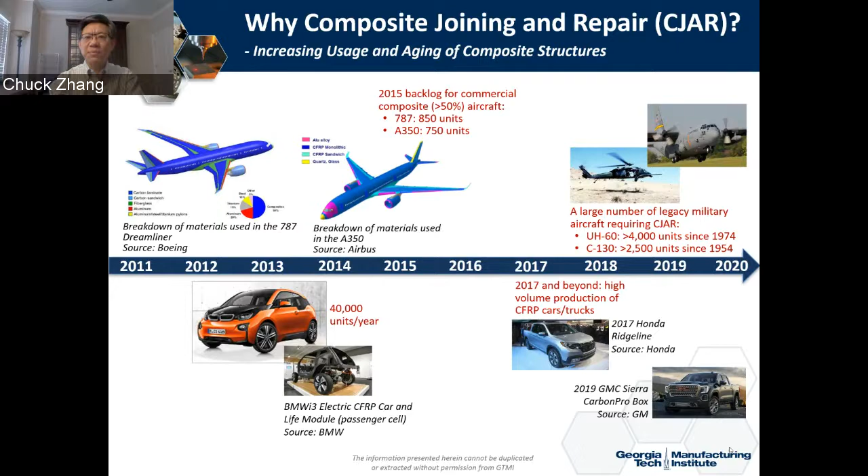This slide shows the financial and economic impact of this area of work. I don't know if any of you have knowledge about this. When you purchase an aircraft, depending on the model, it costs maybe over 200 million to buy one. But the maintenance, we call it MRO, maintenance, repair, and overhaul, can be very high.

For primary aircraft and structures, it costs about 7.7% of the purchase price to maintain the main structure of the aircraft. For example, for a Boeing 787, the purchase price is $218 million, but in the life cycle of the aircraft, over say 20 years, the airline company has to spend $16.8 million on airframe MROs. So that's a lot of money.

Just to give you a number, if you look at all the A350 and Boeing 787 aircraft delivered by next year, the total airframe lifecycle maintenance cost is estimated at 34.1 billion. So that's over 34 billion just for airframe maintenance down the road.

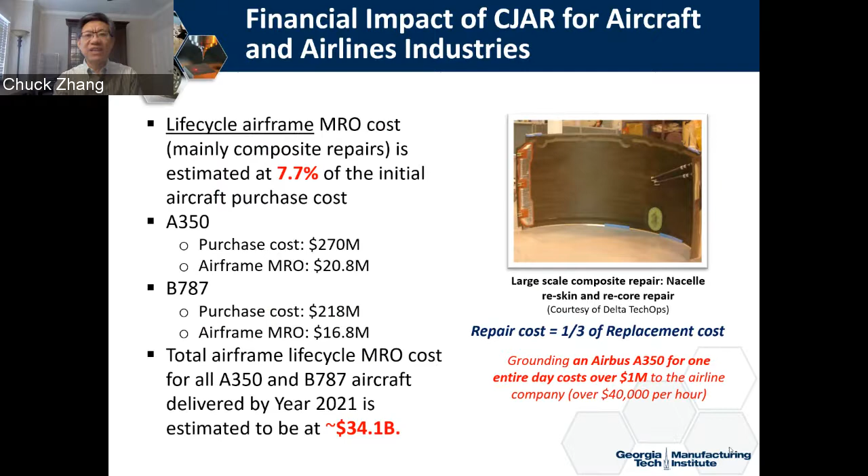On the right side there's a specific example of a composite skin of the engine of an aircraft, and you can see the repair cost is about 1/3 of the replacement cost, like buying a new one. So it's very expensive. Also, grounding an Airbus A350 can cost the airlines over $1 million per day, because of delayed or cancelled flights. So you can see there's a big financial and economic impact in this area of work.

Of course, like I mentioned, there's national security and societal impact in addition to the economic impact. You can see that composite joining and repair work can help improve military equipment readiness, but also reduce the cost of maintenance for national security applications.

Societally, I think everybody probably has a lot of experience with this when you fly. You definitely want good equipment for the aircraft so that it's safe, but you also want high on-time rates with no cancellations or delays. And again, emission reduction—if you have a lighter aircraft, you save energy, which helps the societal impact.

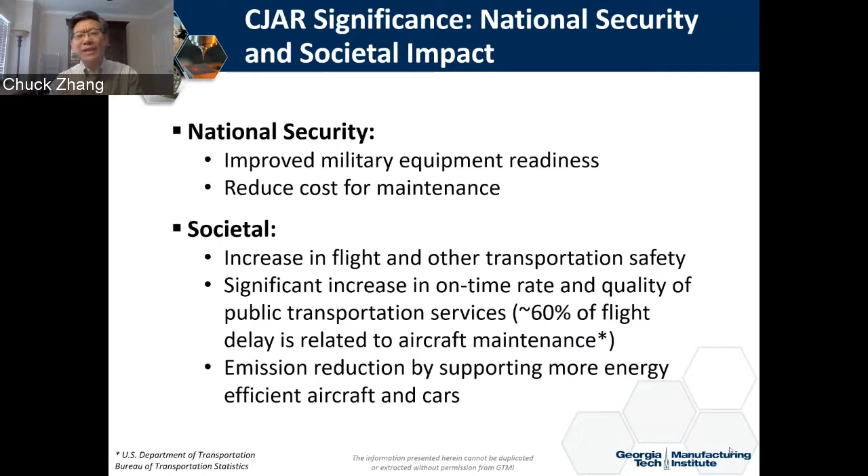The other thing I want to quickly mention is a number—I don't know if you know that 60% of flight delays are related to aircraft maintenance, not weather. When airlines have a cancellation or delay, they always say it's due to weather, but actually 60% of the time it's because of maintenance.

So now we know it's very important, and there's a lot of need and demand for technology development in this area, with a lot of financial, national security, and societal impact.

So in 2014, about 5.5 years ago, Dr. Ben Wang, who's the executive director of GTMI, and myself wrote a proposal to NIST, the National Institute of Standards and Technology. They had a program at that time called AMTech, Advanced Manufacturing Technology, which provides funding for a team from a university or industries to develop technology roadmaps—not technologies themselves, but the future development trends in a specific technology area. We wrote the proposal and received the grant.

When we started the project, we polled industry members. Many of them, we went to the CAMX conference, where we had a special session and polled 80 companies. From all this feedback from industry, we asked them to rank the technologies in composites that they wanted us to develop a technology roadmap for.

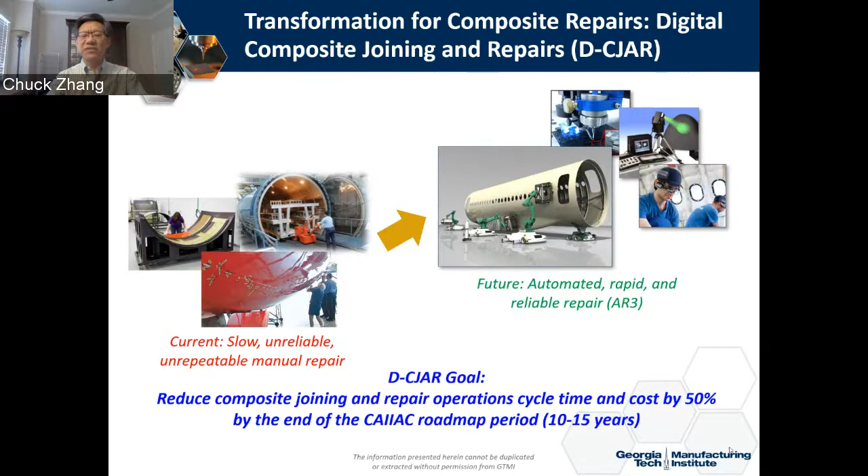So we wanted to know what is the current technology, state of the art, and what are the issues, what are the gaps, and then what is the future technology development, the trend, and an analysis of those trends.

So we actually adopted this technology roadmap development methodology, and we basically have two phases. Phase one is to develop this roadmap. Phase two is to have this consortium implement it by conducting projects and forming more technology development and demonstration, especially facilities and test beds.

So in the first phase, that's the NIST project. Basically, we gather data from the industry experts, and then we look not only at the input from these experts, but also at the scientific publications, patents, and databases, and then combine those data and formulate it into a kind of roadmap.

In the roadmap, we not only look at the technologies, but also look at their maturity, like TRL, MRL levels, during this 10 to 15 years of development. And then we validate the roadmaps with those experts. So that is phase one.

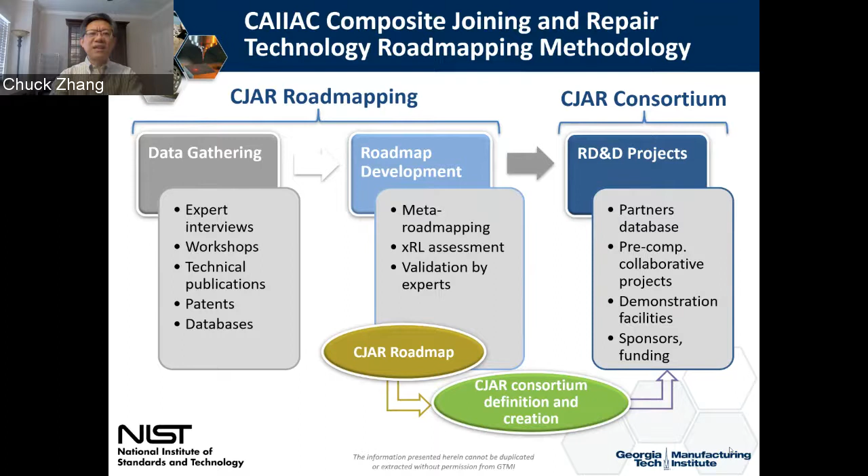I'm going to talk about this phase one work. In fact, the first thing we did, I believe it's 2015, we looked at the current roadmaps available that were developed in the last about 15 years in the area of composites, and we found many of them, actually over 40 of those roadmaps are available.

So we thought, well, we need to do something different because they already have 40 roadmaps. Why do we do another one, right? So we thought that our meta roadmapping, which I mentioned earlier, combines the scientific publication data in addition to the experts from industry, but also the patents and all that. So that is one uniqueness of this roadmapping effort.

The second one is we involve or include the technology maturation parameters, like in this case TRL, MRL. We also created another readiness level: one is a business case, and the other one's ecosystem. So we want to look at if this technology is not only technology-wise mature, maybe manufacturing technology is also mature, but what about the business case and ecosystem? We also look at that during this technology roadmapping effort.

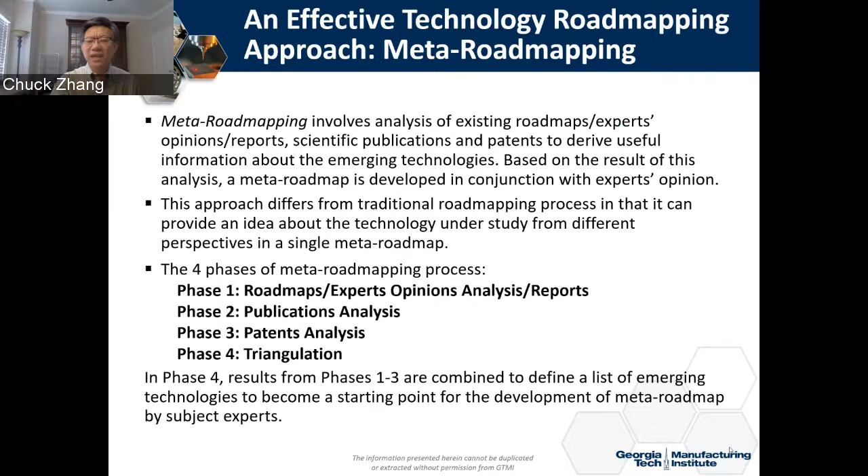In addition to the workshops, we also did a lot of phone interviews with specific experts in specific areas, so we made many calls. And then we combine all the data. That's phase four, which we call triangulation. Basically, you get all those data from these three sources, and then we combine them to make this technology roadmap.

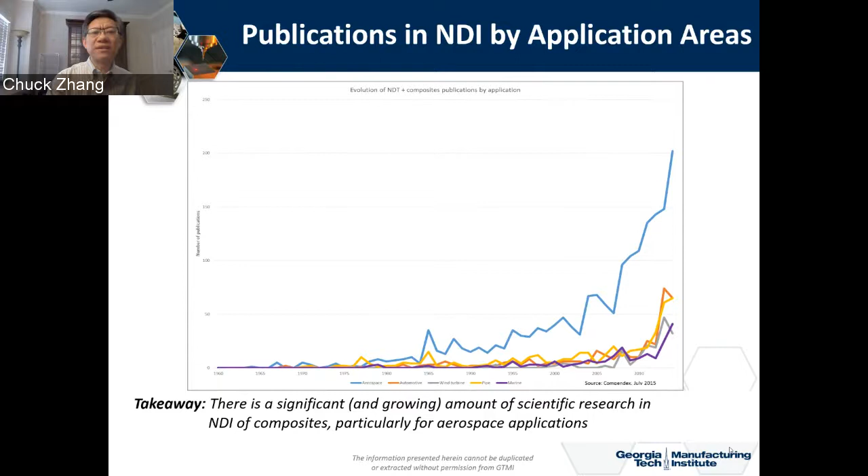So you can see, especially in the last 10 years, this area has gotten a lot of attention. And then, more importantly, we can do some quantitative NDI analysis.

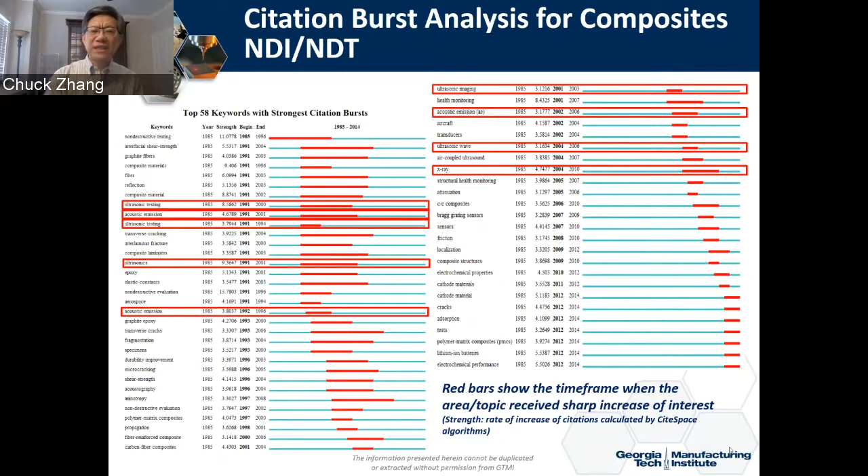You see a lot of technology that moved - some developed many years ago, and then had a certain time frame, like 5-10 years, where they were pretty popular or hot, but then they kind of disappeared. And some of them actually came back again, like acoustic or ultrasonic things - it was hot in the 1980s and 90s, but disappeared for a while, then now it's coming back again, probably because of progress or advancement in that area, or computing technologies that can help. So this will also help us develop the roadmaps.

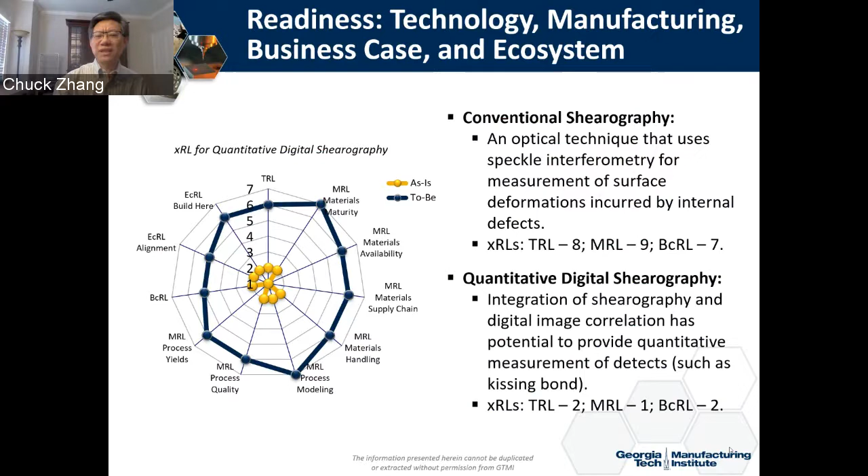This is about the readiness. So for each technology area, when we develop a roadmap, we also look at what is the TRL level of this technology at the current stage, and what is expected 5 years down the road, 10 years, and 15 years - what do we expect them to grow. This data is from publications, but also from industry experts' input.

So finally, about 3 years ago, we finished the project and published this technology roadmap in the 6 areas, and we even made a book. We have an electronic version - if you're interested, please feel free to contact me and we'll send it to you.

This is just to give you an example - one of the examples for one of the NDI areas, the general NDI. You can see it covers several technology areas, from very old technology like visual inspection, all the way to ultrasonics - there are several ultrasonics - and radiologies, and terahertz imaging.

On the right side, it shows the 15 year time frame, how we expect those technologies to develop or mature. For instance, if you look at Lamb wave - I'll just pick an example - that's one specialized ultrasonic technology. We thought it'll take about 10 years to develop.

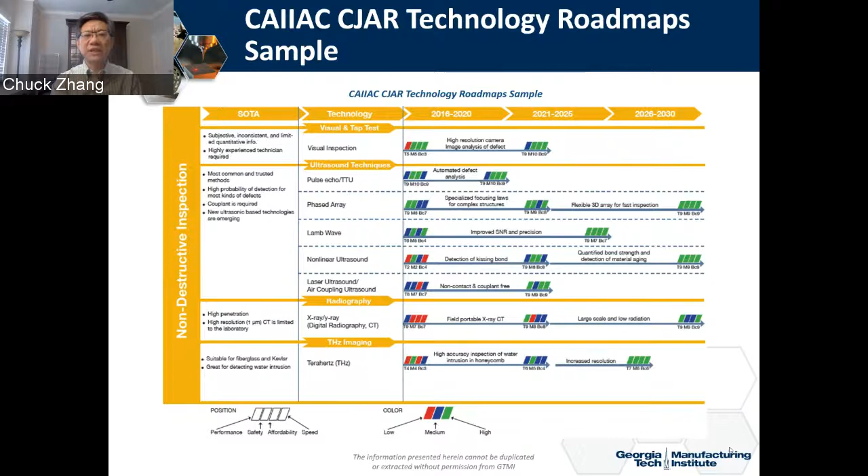So this just shows one chart, but we have many of them, like materials - materials have multiple charts, and equipment and automation also have a chart. So that is kind of showing the roadmaps.

This is the major work we did, and after that roadmap developed, with the industry experts' help, we looked at the vision of this technology development in the next 10, 15 years. We want to achieve this automated, efficient, reliable repair process - what are the key technology areas we should develop? This slide lists 6 major technology areas that we should develop and mature.

We call it digital composite joining repair, relying a lot on digital technologies. For instance, the first one - we want to have structural damage evaluation before the repair. Right now, most of this work is done by a manual process - you'll see a technician go around the aircraft.

They actually use a coin to knock the structure and use their ears to listen, and that's what a lot of companies are doing right now - basically an experience-based, trial and error kind of process. But in the future, we would like to have digital AR or NDI technologies so the technician can remotely monitor this damage evaluation process.

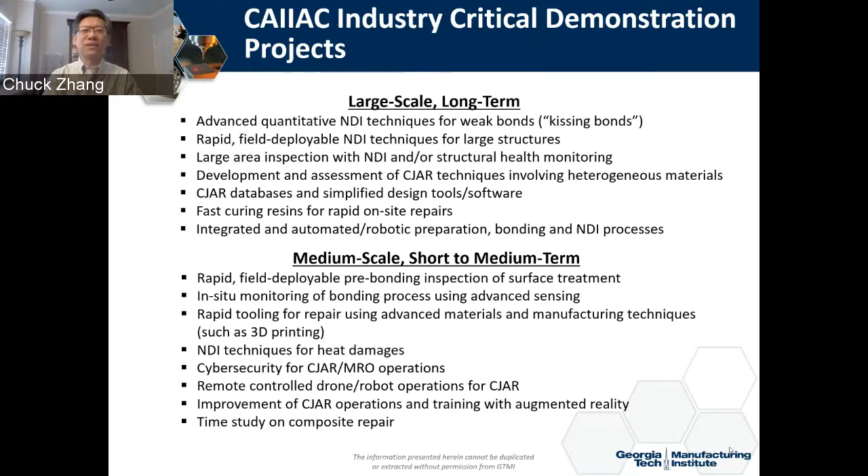This consortium also helped us, at the end of the project about two years ago, develop a laundry list of projects—large-scale long-term projects, but also medium-scale short-to-medium-term projects. We're using that as guidance to develop our research programs in GTMI. I'm not going through this now, but you'll have this information later so you can look at the list.

Next, I want to show you GTMI's capabilities and research in this field. I'd say GTMI has capabilities and competency in four areas. First, over the last five to six years we've built up a lot of fundamental understanding of materials and processes in composite joining and repair. We also have a comprehensive set of equipment for this area of work, and a lot of collaboration with other schools—ISYE, ME, MSE, and other related units. We've built a very strong capability in data analytics and cybersecurity for composite joining and repair. Finally, we have very unique work in quantitative NDE, especially for kissing bond detection, which is a major problem for aerospace applications of composite bonded structures. I'm going to show you some detail of our work in this area.

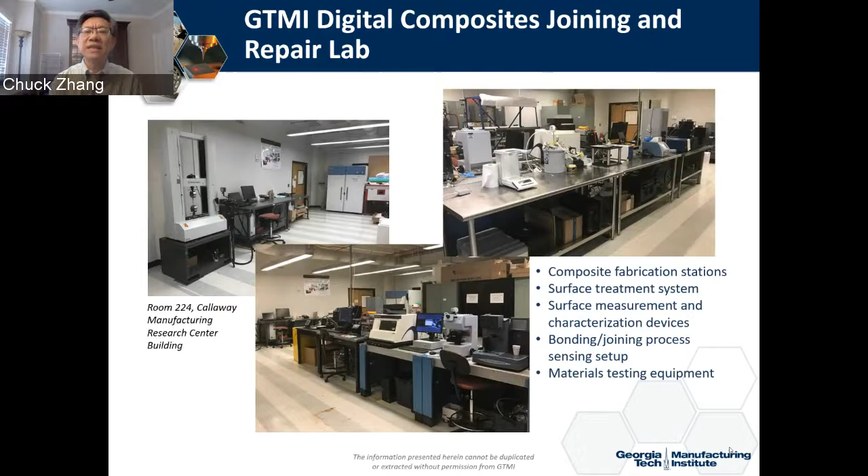I want to quickly show you four areas of our work in GTMI related to composite joining and repair: monitoring of the bonding process with advanced sensing, quantitative NDI, computational modeling and AI tools for composite joining and repair applications, and finally a planned use of augmented reality for CJAR operations.

A few years ago we started this area of research. We found that a lot of industry companies doing composite joining and repair primarily rely on manual processes—they don't monitor the bonding process well because there's no technology for it. So we thought, well, there's a lot of new development in sensing and advanced manufacturing, like 3D printing, so we wanted to develop some kind of advanced sensing specifically for composite joining.

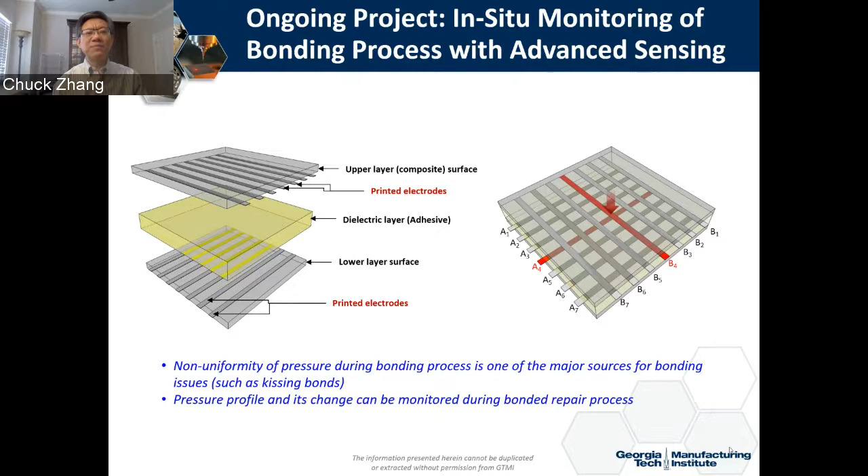The idea is: if you put electrodes on the surface of the adhesive. Let me introduce this a bit—when you repair an aircraft structure, you have a piece of composite material on top and composite on bottom, and you put an adhesive film in the middle, usually about 1 to 2 millimeters thick. You pack them, vacuum bag them, then put it in an oven, autoclave, or heating blanket. You heat it so the adhesive melts and bonds the two pieces. If you put an electrode on one side of the composite and another set of electrodes on the other piece, arranged in a certain pattern, it can be used as a sensor.

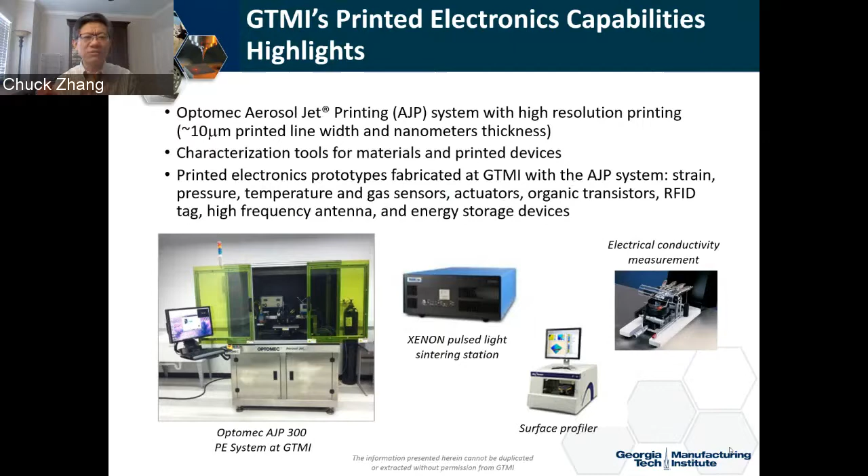So what we did—GTMI has a lot of advanced manufacturing capabilities—in this case we used printed electronics to print those electrodes, miniature micron-sized electrodes, and placed them between the two bonded structures. We can monitor the pressure during the bonding process, as well as the curing of the film. This is part of a Delta-supported project on monitoring composite aircraft repair and maintenance, and the results are pretty good—we validated them with our testing equipment in the lab.

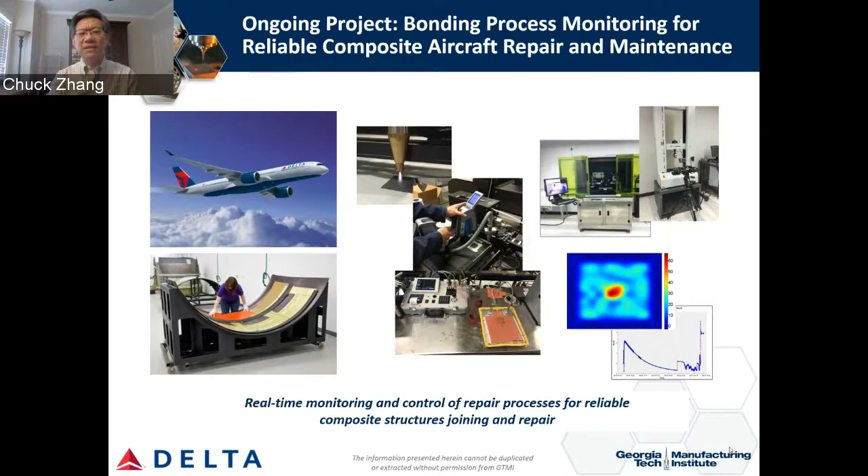And the other work that we're doing is that, if you have something at home that's broken and you want to glue it together, you buy a super glue from, say, Home Depot, and you probably want to clean the surface first, make it rough, and then put the super glue and bond them. Similarly, in composite aircraft repairs, it's the same process.

You want to clean the surface first, and then put the adhesive film in the middle, and then bond them. So how do you clean them? How do you make sure the surface is clean and well suited for bonding with that adhesive? There's a lot of scientific work that needs to be done.

So in this case, for cleaning, certainly you can use sandpaper to clean. That's what a lot of industry partners are doing. But if you use sandpaper with a technician, it's not reliable because people are different. Even the same person in the morning you ask to clean a surface, and in the afternoon, the quality might be different.

But if we use an automated process, like in this case we use plasma, it's basically more like a CNC. You can program it, and you can use the plasma stream to clean the surface.

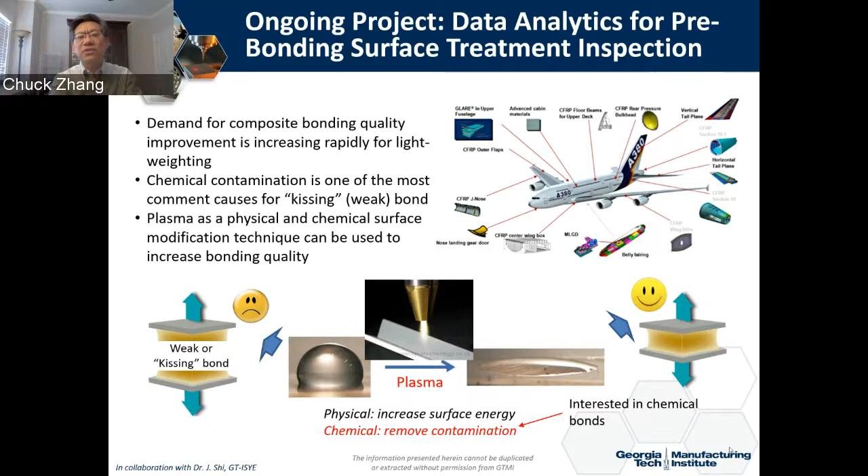So this we use to look at the surface tension, as you probably know from other work. By the way, this is work in collaboration with Dr. Shi of ISYE, where we use data analytics to pre-process the raw data from FTIR. We can actually enhance the measurement.

We can even quantitatively analyze the contents of the contaminants—like if there's oil there, how much oil is it? Is it a very small, tiny amount, or a big amount? So I wouldn't say purely quantitatively, but quasi-quantitatively, we can at least show the rough amounts of those contaminants. This can help the bonding, surface analysis, and surface treatment.

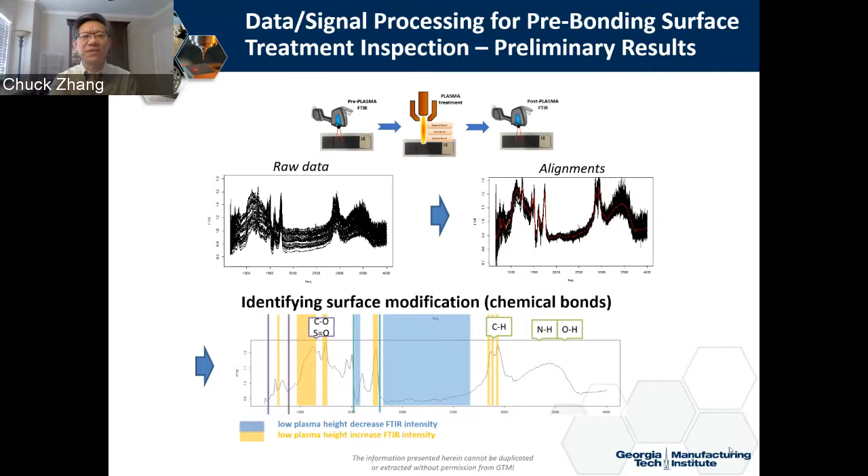So those are ongoing work, and this is another ongoing project sponsored by Delta. We're making some coupons and testing them, and then using machine learning to develop material and process models to help their repair processes.

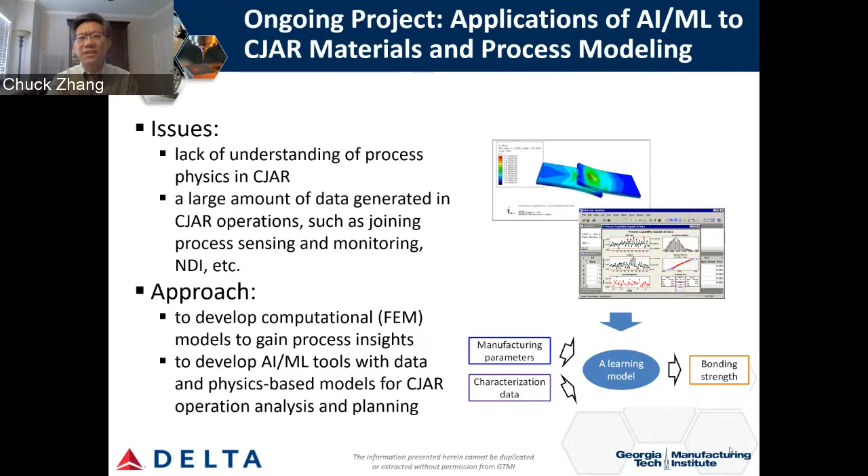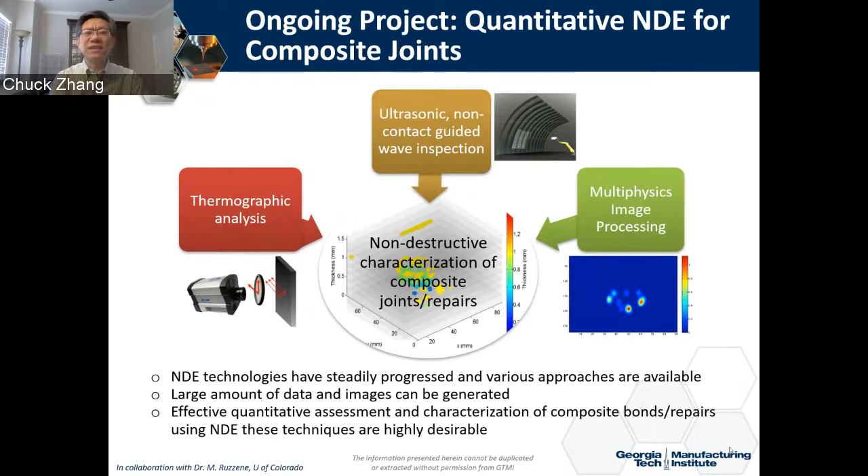And this is another area of work, quantitative NDE. We're combining a lot of different NDE techniques, like ultrasonic guided wave, thermographics, and X-rays. We combine all this data—a lot of it complex images—and use machine learning to actually quantify what the defects or kissing bonds are.

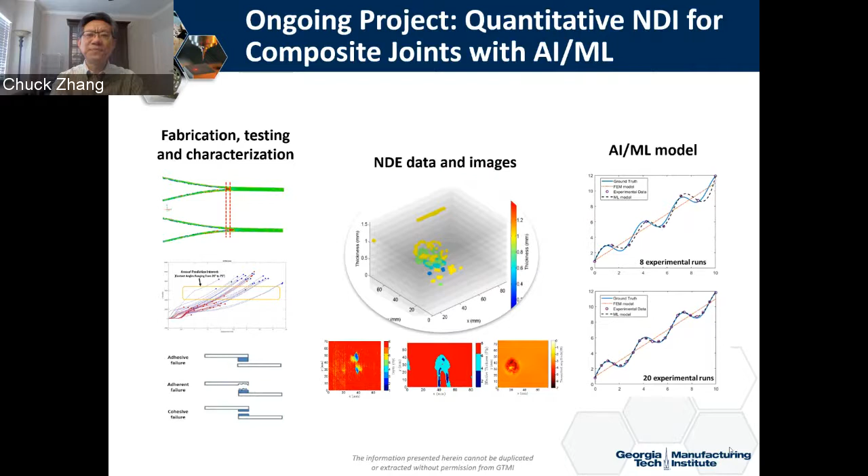So this generates results like here—you have some testing coupons, and then you have this NDE data, and through those images and data we can get this machine learning model. So this is an ongoing project.

This can also help guide the technician to do the real repair process, reducing cycle time and operation errors. This has been proven by many other applications.

So what we're thinking, in discussion with Delta and other industry partners, is if a technician wants to repair a structure of the aircraft and needs to know where to put the screws, or remove or install them, they need to know the underlying structure. It's like the stud finder you can buy from Home Depot, but aircraft is different, so the stud finder doesn't work.

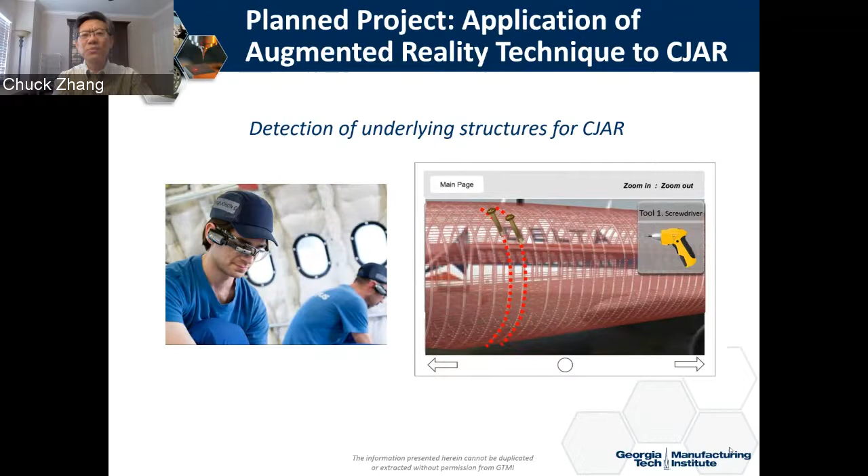Okay, so that's what's going on in GTMI in this area of research, and we have a lot of ongoing projects and some planned projects. I want to spend another maybe 3 minutes to talk about the next step.

Since we have done a lot of work in this area, we got a lot of requests from industry, and also as part of phase 2 of that NIST project, we should develop a consortium, industry-led, to really develop technology in this area and deploy them. So how do we do it?

We found out the National Science Foundation has a program called IUCRC, Industry University Cooperative Research Center, and that provides seed funding to formulate this consortium and for basic operation. But then the research dollars will come from industry. So this is a pretty good model for us.

We actually just submitted in August - we submitted a proposal to NSF IUCRC. We were planning to form this center called the Composite and Hybrid Materials Interfacing, CHMI. The goal is to start this consortium by spring 2021, and we have 3 university partners.

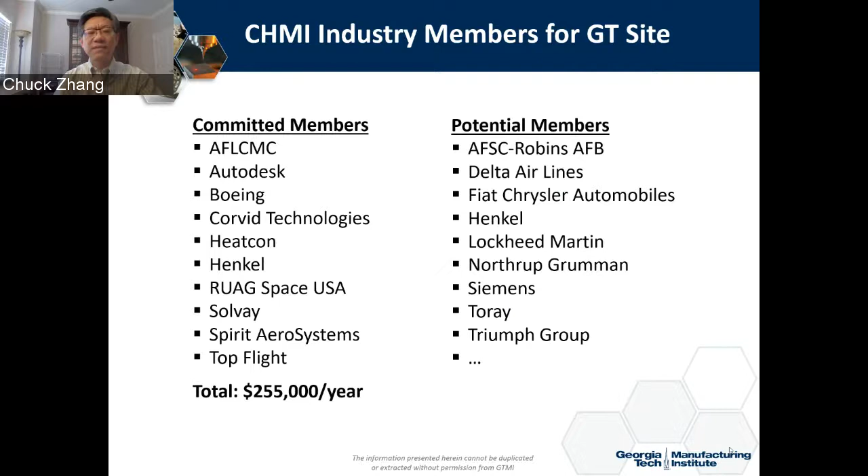Anyway, so that's pretty much all I have, because I know we have only about 5-6 minutes left for question and answer, so I want to stop here.